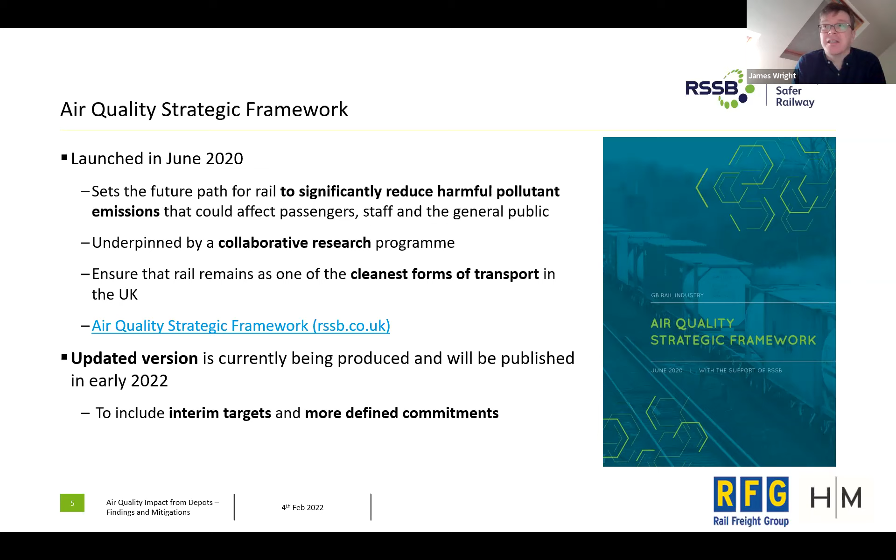We know there's obviously a carbon advantage of rail over other ground-based transport modes, but we really want to make sure the air quality impact is properly understood and minimised as much as we can. The air quality strategic framework is currently being updated, so the new version should be published towards the end of this month, and this will start to be a little more defined in terms of including targets and more defined commitments for the industry.

In terms of the background to this project, when we first started looking at air quality in rail 3 years ago, there were obvious areas of concern, like busy passenger stations. We knew there was a bit of an issue in Birmingham New Street, for example, and some stakeholders from the freight sector started to really highlight that we didn't know enough about train depots, especially urban train depots, and what impact they might be having on urban air quality.

So we established this project to provide an accurate picture of air quality at train depots. As Tom will run you through the details, we covered 3 passenger depots and 3 freight depots. Based on the study and its findings, we produced guidance for the industry on what measures you can take to improve air quality.

It's worth pointing out that the main focus is more on public health and nuisance rather than occupational health, but where we did find one or two areas of concern in terms of occupational health, we did highlight that to the depot operators.

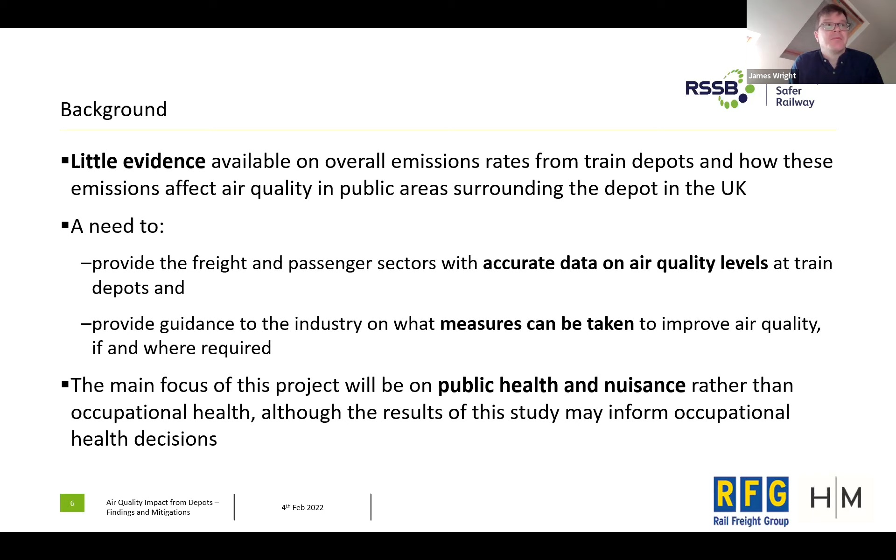In terms of the scope of work, we had 6 depots, 3 from freight and 3 from the passenger sector. We monitored air quality within and at the perimeter of the selected depots. Then, in order to build up an inventory of emissions, we undertook a study of all the various activities that would create pollutant emissions we're interested in, mainly PM and NOx, and developed a high resolution emissions inventory. Tom will guide you through some examples of how those were built up.

Based on that, we used industry standard air quality techniques to model the dispersion of those emissions and see what impact they had on local air quality. Then, based on the surveys that had taken place, we looked at possible mitigation measures, and we developed a good practice guide, which I'll put a link to in the chat later so everyone can download it.

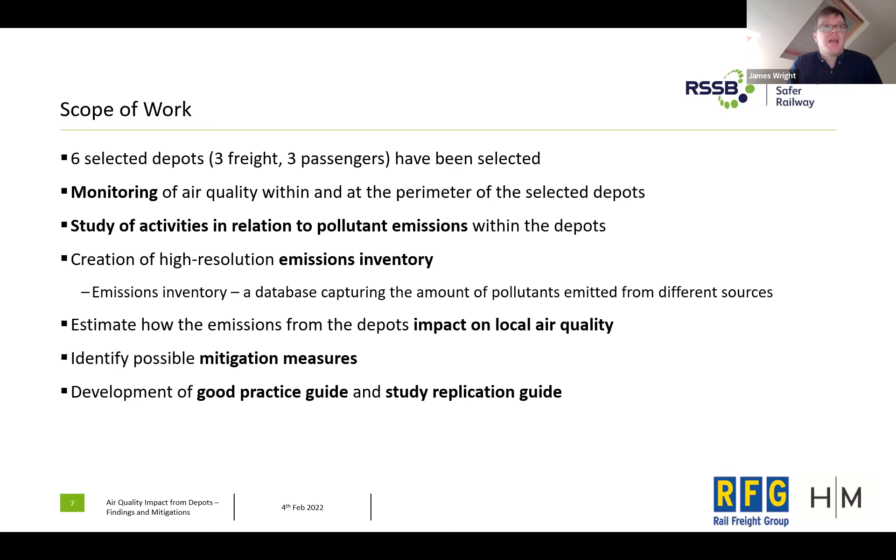Thanks, James. Make sure the slides are working. So I'm going to give you a brief overview of what we did in terms of the project, the findings of the freight depots, and then I'm going to touch briefly on the study replication element. Phil will then follow on with covering the good practice guide and some of the mitigation elements we covered afterwards as well.

Initially, I'm just going to talk briefly about local air quality in terms of what we consider in terms of the objectives. So we took the UK standard air quality objectives as the principal guidance for assessing this, for NO2, PM10 and PM2.5 - those were the objectives that we utilised.

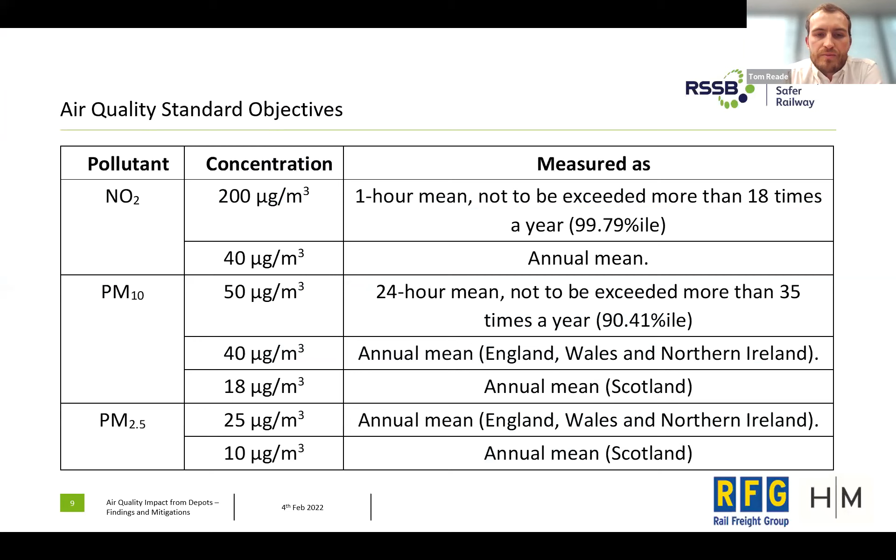Looking particularly at the freight depots we considered, I've taken 2 just for ease of this presentation, though James indicated we covered 3. So we looked at Leeds Midland Road and Leeds Valley Farm Road, which are both freight depots and actually serve one another in Leeds. As background, Leeds City Council have a number of existing air quality management areas for the exceedance of nitrogen dioxide, indicated in the image on the right-hand side of the screen there, with the closest to Midland Road being approximately 2 kilometres to the west, and to Valley Farm Road being 3.3 kilometres.

So these AQMAs have been designated for nitrogen dioxide, and within those, the existing air quality monitoring data has identified exceedances. It's worth pointing out that the monitoring data in the vicinity of these two depots was actually compliant with the objective, and that included some continuous monitoring for particulate matter as well.

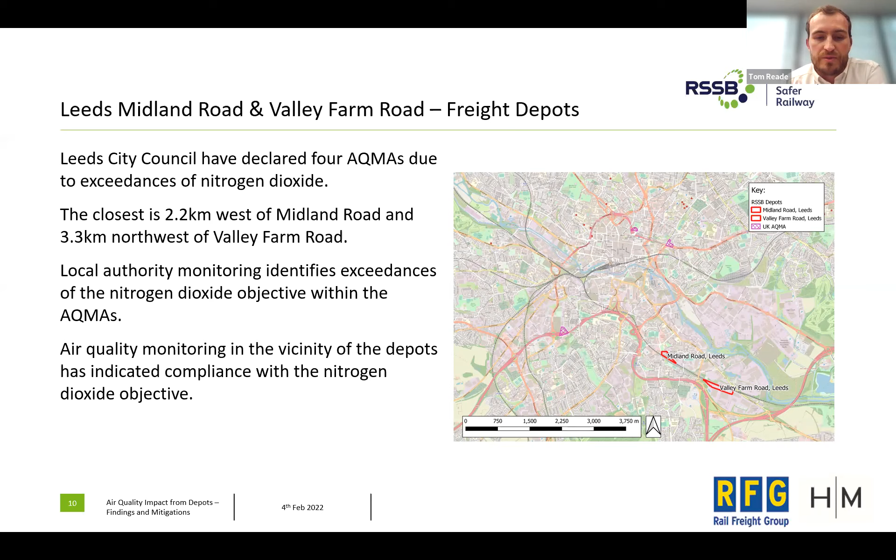So I'm going to move on to the main depot sources. Looking at Leeds Midland Road to start with, we identified the rail activities, the road traffic elements of that, the non-road mobile machinery, and the combustion plant.

On the rail side of things, we looked at the rail lines themselves, the locomotives coming in and out of the depot and utilising the lines, and also the rail lines confined to the sheds, which incorporated fuel sheds or maintenance for both long-term and short-term servicing. The road traffic element was considered for usually the employee car parks and things like that, and also the routing for the non-road mobile machinery.

And the combustion plant, as you can see from Leeds Midland Road, is in the centre of the screen there, indicated by the red dot. So that was usually for the provision of heating and hot water.

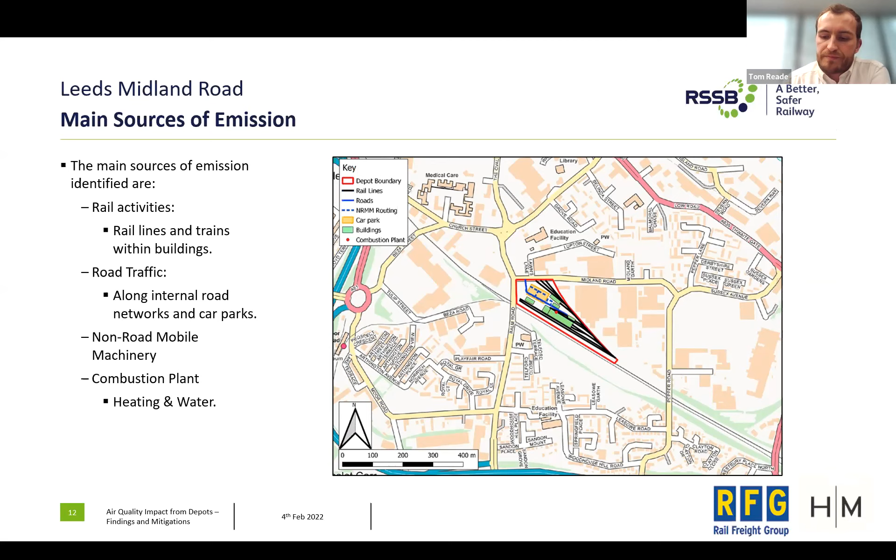Just taking a minute to skip over the slide.

So the main sources on Leeds Valley Farm Road were significantly less than Midland Road. Here we only looked at the rail, road traffic and the non-road mobile machinery and the car park. There were no sources of emission from the buildings within this shed. So typically at Leeds Valley Farm Road, the locomotives come from Midland Road and then join up onto the tracks in the northwestern part of the site.

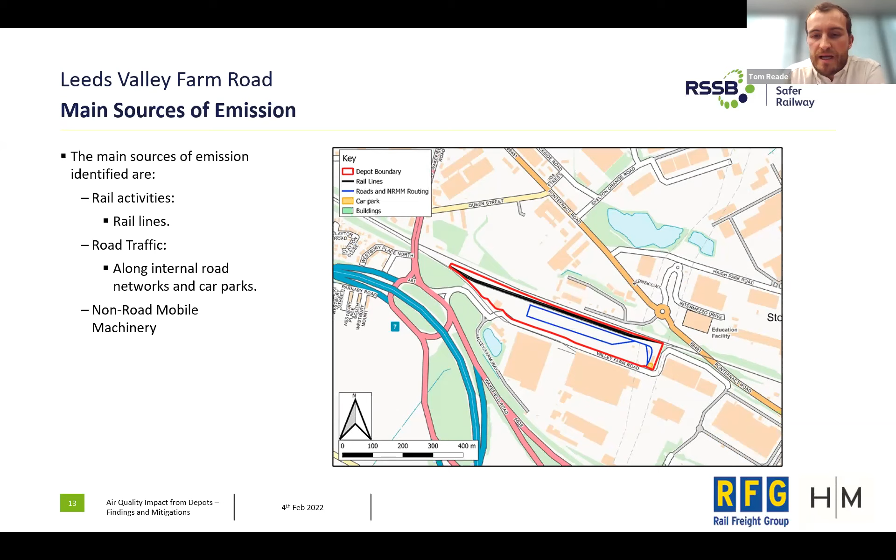Looking at the air quality monitoring side of things, we installed continuous monitoring air quality equipment at two locations. The first was at a background position across the site, and that was in a position for three months. We also utilised another continuous air quality monitoring unit, in order to give us a glimpse of the emissions or the operational emissions from various key activities within the depot.

So at Leeds Midland Road, that incorporated the fuel shed, the maintenance shed and the wheel lathe shed, where a large proportion of their key internal operations happen. We also installed a number of diffusion tubes, predominantly looking at nitrogen dioxide, and they were installed along the perimeter fencing and at some of the key activities within the depot. We typically co-located the diffusion tubes with the continuous monitors.

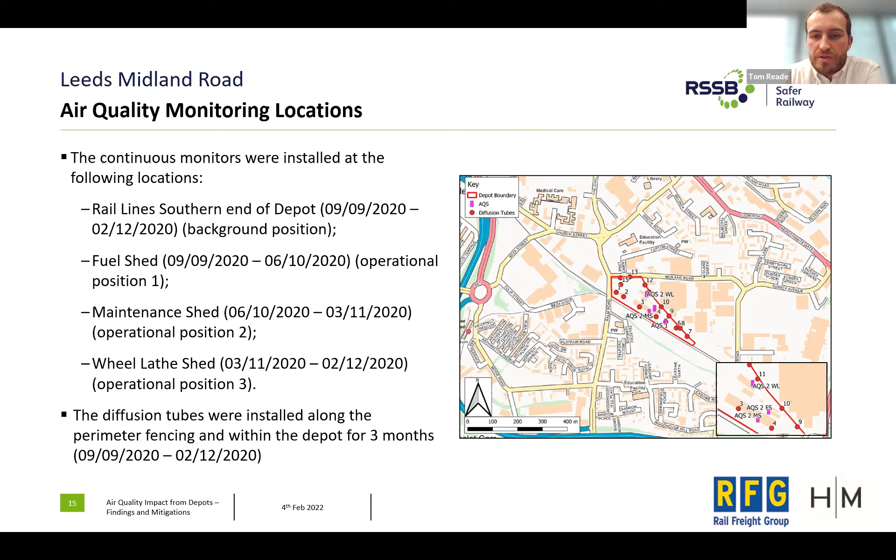Leeds Valley Farm Road, again, we installed two continuous monitors. The first one was at the rear of the workshop, which was located as the background position, and the second was at the locomotive inspection deck, which was on the eastern side of the depot.

Typically at this depot, we didn't need to move the second unit around to capture other activities, because the key activity at this depot was captured both from the movement of vehicles and from the arrival and the idling of the locomotives at the inspection deck.

We also installed a number of diffusion tubes along the perimeters, as we did at the other depots, and we also captured some of the key activities occurring across the depot as well, and these were in place for a period of three months.

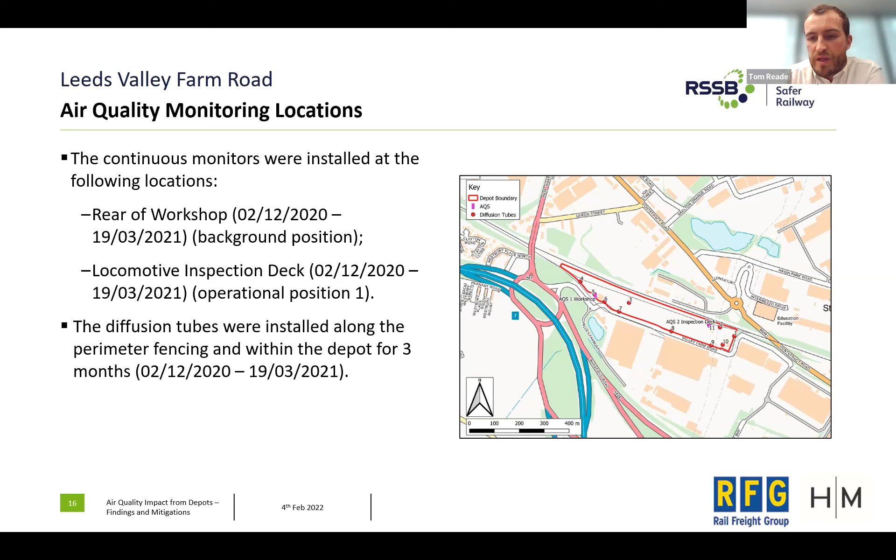So in terms of the key findings for the depots, I've summarised these that were reflective of all of the depots, but in reality they're very much pertinent to the freight depots as well.

So the measured air quality concentrations were typically highest within the sheds. That would be the short-term servicing sheds, where locos would typically come in, be serviced and often left idling or running, compared to the long-term or heavy maintenance sheds, where locos could be in there for anything up to a week, two weeks, three weeks, depending upon the exam being undertaken.

Concentrations within open-ended fuel sheds were typically high, again because of the idling of the locomotives. These were obviously lower than those within sealed servicing and maintenance sheds.

When no servicing, maintenance or refuelling took place, these concentrations were typically higher along the rail lines, usually at the entrance of the depots, where locomotives were often idle before they were sent across to various places for storage on the sites.

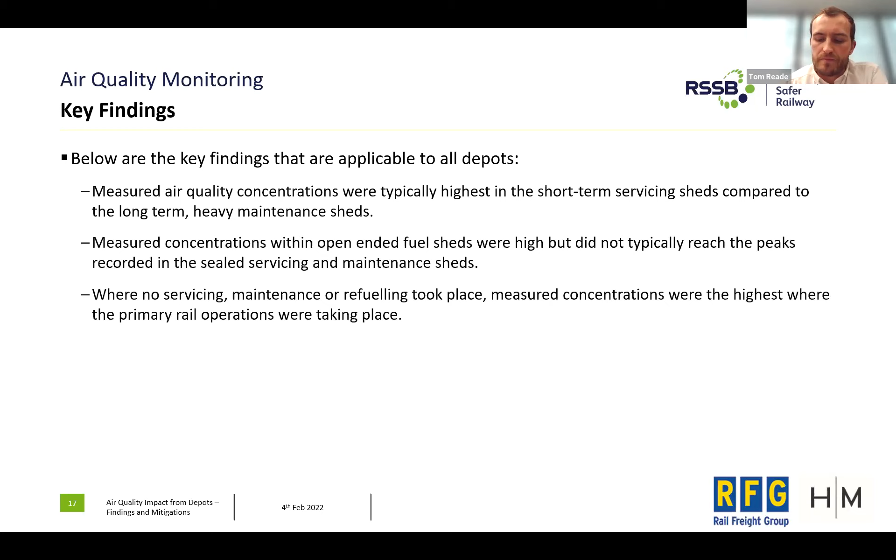So now moving into the air quality modelling side of things, we're looking at Leeds Midland Road to start with. As James indicated, we produced an emissions inventory capturing all of the sources on the depot.

For each emission source, we classified them as transport, domestic and industrial plant, and industrial machinery. Transport incorporated buildings, meaning the locomotives operational within those buildings, car park, rail external to the buildings, the road, and road transport. Domestic and industrial plant reflected any combustion plant on site, such as gas-fired or diesel boilers, usually for heating and hot water, and then non-road mobile machinery.

At Leeds Midland Road, the greatest contributor to emissions, both NOx, PM10 and PM2.5, was from the transport element, in particular the rail. They typically use Freightliner Class 66 and Class 70 locomotives.

Second to this was the operation of the combustion plant for heating and hot water provision for the depot. At this depot, the plant in question was circa 15-20 years old, and since this assessment was done it's been on the agenda for replacement anyway. Thirdly, non-road mobile machinery had the smallest contribution at this depot.

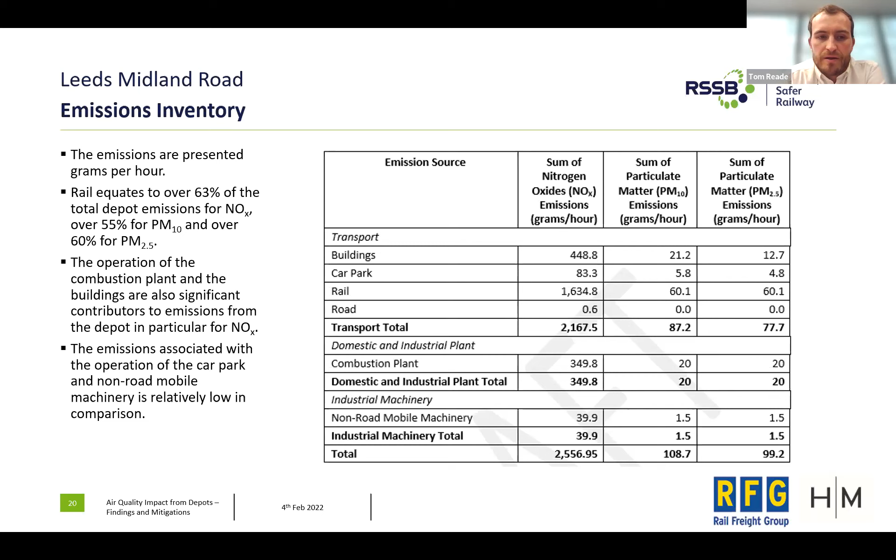Looking at the diurnal emissions, we looked at daytime emissions for NOx, PM10 and PM2.5, and also nighttime emissions. For Leeds Midland Road, there's very little diurnal change between daytime and nighttime emissions, typically because the majority of activity is relatively consistent.

Key times of day, particularly morning and afternoon, are when locomotives typically enter and leave the depot, but a large proportion of servicing and maintenance regimes on this depot are 24-hour operations. Alongside that, the combustion plant is also a 24/7 operation to provide heating and hot water.

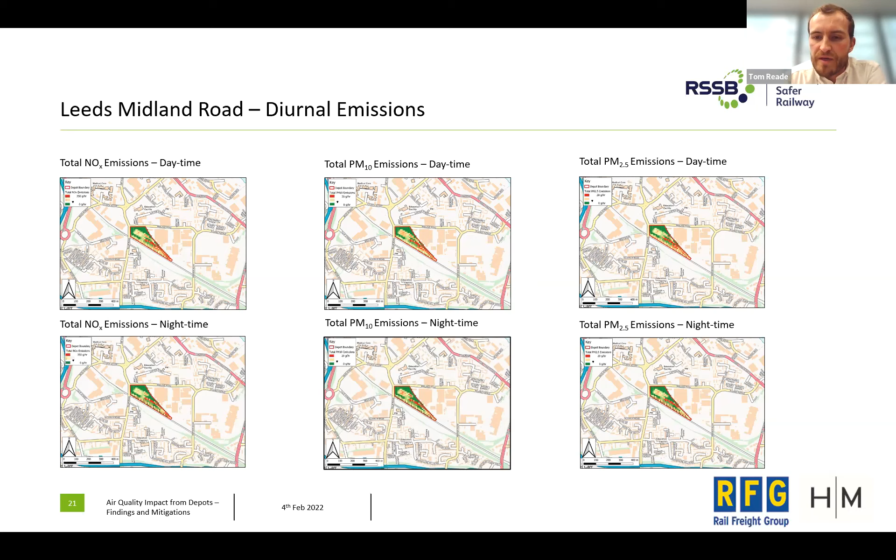We took those emission maps and the emissions inventory and created a series of pollution maps covering NO2, PM10 and PM2.5. As you can see, the key contributors are in the center of the depot, where the on-site combustion plant is located and where the fuel shed and main maintenance and servicing sheds are.

What you'll notice between the emission plots on the previous slide and these pollution plots is that the rail lines running along the southwestern boundary are less predominant here.

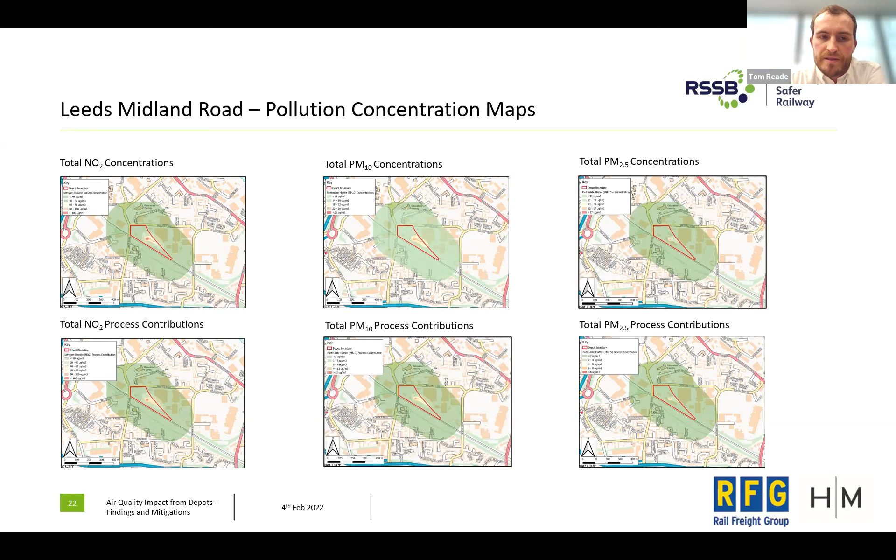The next thing we looked at was correlation with local concern. This was based upon two things: the sensitivity of any land use classes beyond the depot boundary, and any correlation with complaints data provided or received by the depot. We took the distance from the boundary as 200 meters, and classified those areas as high, medium, and low sensitivity.

This was based on the classification in the Environmental Protection UK and IAQM land use planning guide. At Leeds Midland Road, the majority of land use classifications surrounding the site were of medium to low sensitivity, with some high sensitivity receptors located to the south and north. The medium sensitivity receptors are typically industrial office uses.

The predominant wind direction within Leeds is from the west and southwest, so emissions from the depot are typically transported to the east. At this depot, total annual mean NO2 concentrations did exceed the air quality objective of 40 beyond the depot boundary, while total PM10 and PM2.5 beyond the boundary were below the thresholds of 40 and 25 respectively.

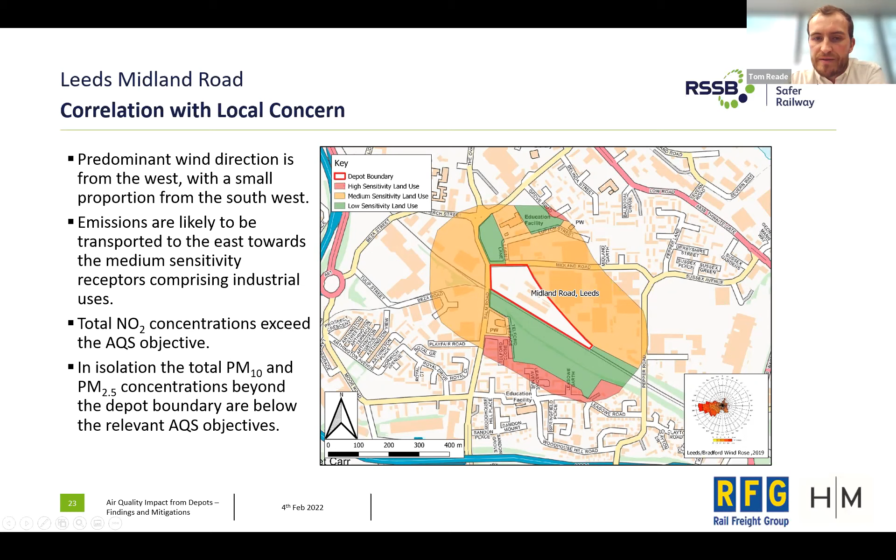So the key findings at Leeds Midland Road were that rail activities, both the rail lines and operational aspects, were a key source of NOx, PM10 and PM2.5, and, more importantly as noted on the pollution plots, the identification of the combustion plant providing heating and hot water.

There were very small variations in total emissions between daytime and nighttime, with daytime very slightly higher due to the arrival and departure of vehicles in early morning and late afternoon.

Total NO2 concentrations exceeded the objective beyond the depot boundary on an annual basis. However, given the nature of the uses to the east, industrial and office type, the short-term objective was more applicable, so further work was done on the short term. In isolation, PM10 and PM2.5 concentrations beyond the depot boundary were all below the relevant objectives.

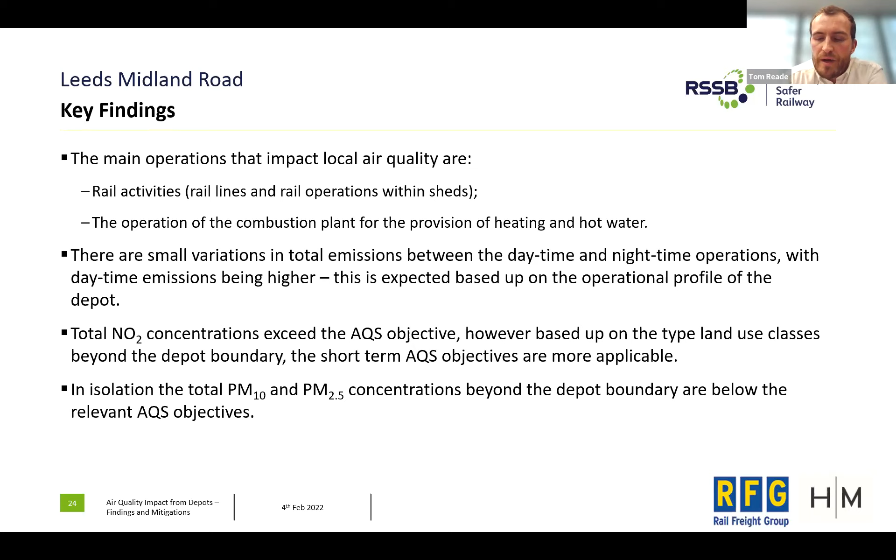Just going to cover Leeds Valley Farm Road now in the same way. So for the emissions inventory on Leeds Valley Farm Road, we took the same approach. We gathered all of the information regarding all of the sources, classifying them into transport, domestic and industrial machinery.

The key difference here between Leeds Valley Farm Road and Midland Road is that the proportion of emissions are highly concentrated towards the operation of non-road mobile machinery in this case. That's because at Leeds Valley Farm Road they have between 5 and 6 arrivals per day, whereas Midland Road is effectively a servicing and maintenance depot, so they have a substantial number of movements per day coming both in and out, plus post-examination testing of locos.

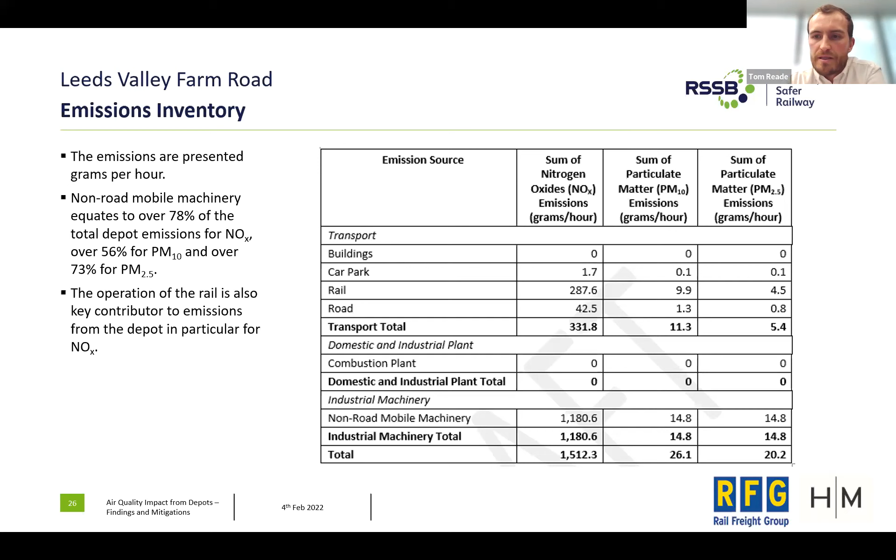In this case, non-road mobile machinery contributed to about 78% of the total depot emissions for NOx, 56% for PM10 and 73% for PM2.5. You will note that in terms of the transport element, rail contributed the greatest part of the transport emissions. So looking at the diurnal profile, for NOx, PM10 and PM2.5.

Between the daytime and the nighttime, for both NOx, PM10 and 2.5, there is very little, if any, diurnal variation. The non-road mobile machinery and locomotives arrive throughout the 24-hour period, so some days there were 3 during the day and 3 at night, sometimes 2 in the day and 3 during the night. Typically, across a typical day, the emissions were largely consistent between daytime and nighttime.

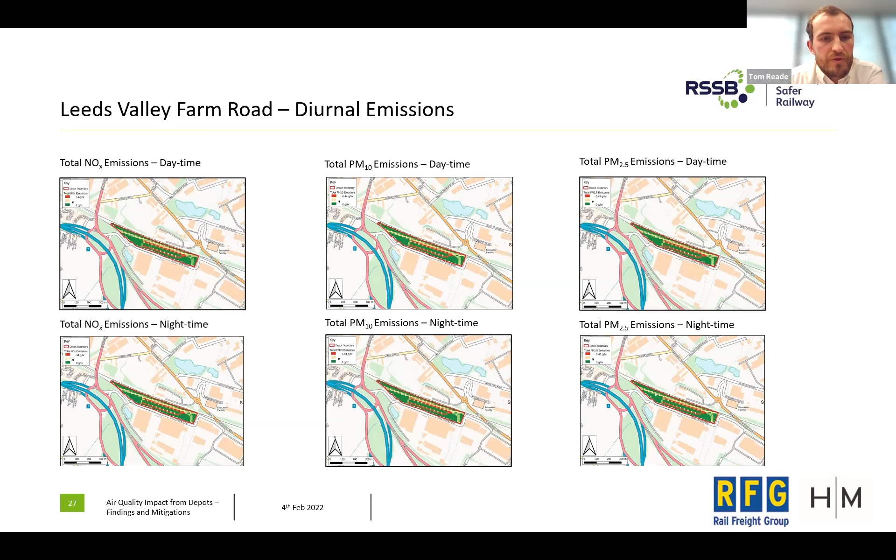On that slide you can identify the emissions from the rail lines, which run from the northwest to the southeast. You can also identify the routing around where the non-road mobile machinery was tracking, on the red line, which comes down from the northeast around the southern or southwestern boundary.

Converting that into pollution concentration maps, we again looked at NO2, PM10 and 2.5. The top images are total concentrations and the bottom 3 images are process contributions. Considering the NO2 total concentrations, you can see that the highest concentrations are limited to the center of the site, and the same with PM10 and 2.5.

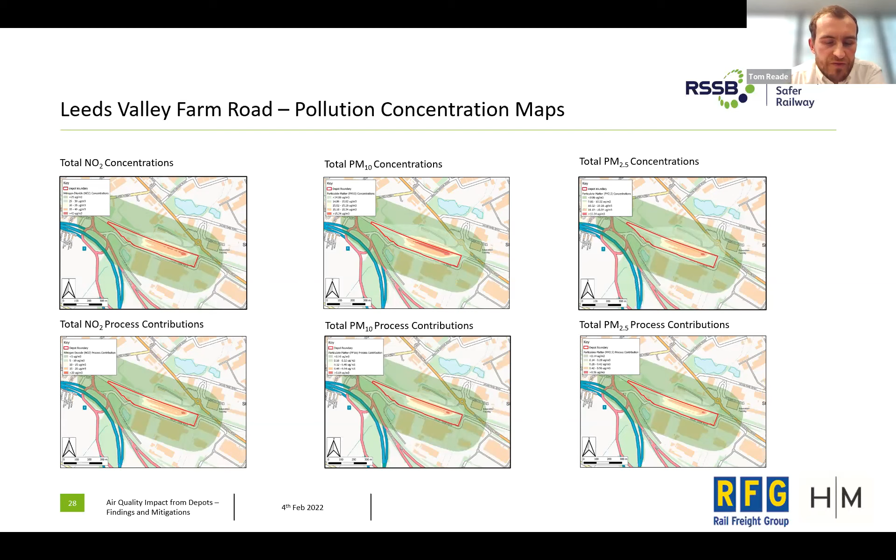That's typical in terms of where the key routing is in the arrival and idling of the locomotives, which is on that red section, where the highest pollution concentrations were identified. And that's reflected in the process contributions as well.

From the correlation of local concern, the sensitivity of the land use classes around the outside were low to medium, with a very small proportion of highly sensitive to the west. Leeds is based where the wind is predominantly from the west, so the majority of emissions from the depot taken beyond the depot boundary occurred on the eastern side of the site.

In isolation, the depot itself - the total concentration of NO2, PM10 and 2.5 beyond the depot boundary were below the air quality objectives. However, there were some exceedances within the depot boundary itself.

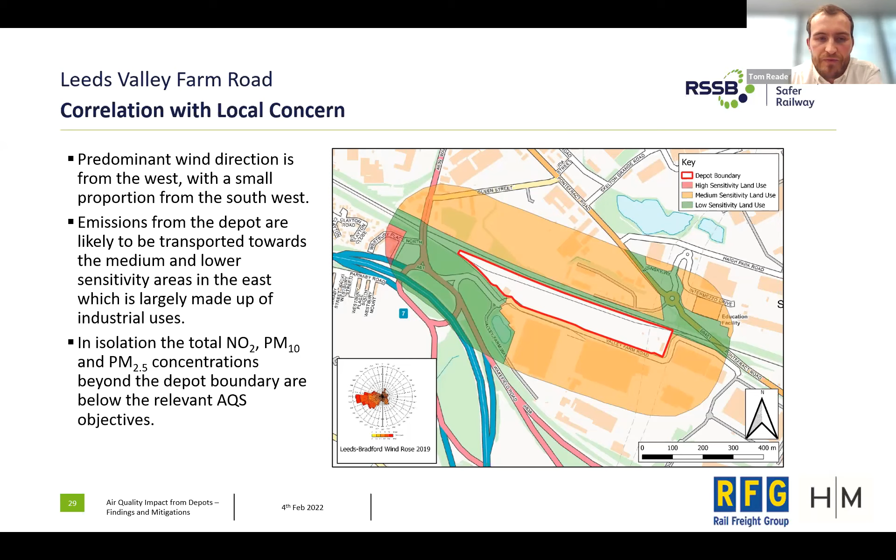So the key findings at Leeds Valley Farm Road were that the key sources of emissions were from the rail, on the rail lines, and more predominantly from non-road mobile machinery. There was little to no diurnal variation between daytime and nighttime, which is expected based on the operational profile of the depot. In isolation, NO2, PM10 and 2.5 beyond the depot boundary were also below the air quality objectives.

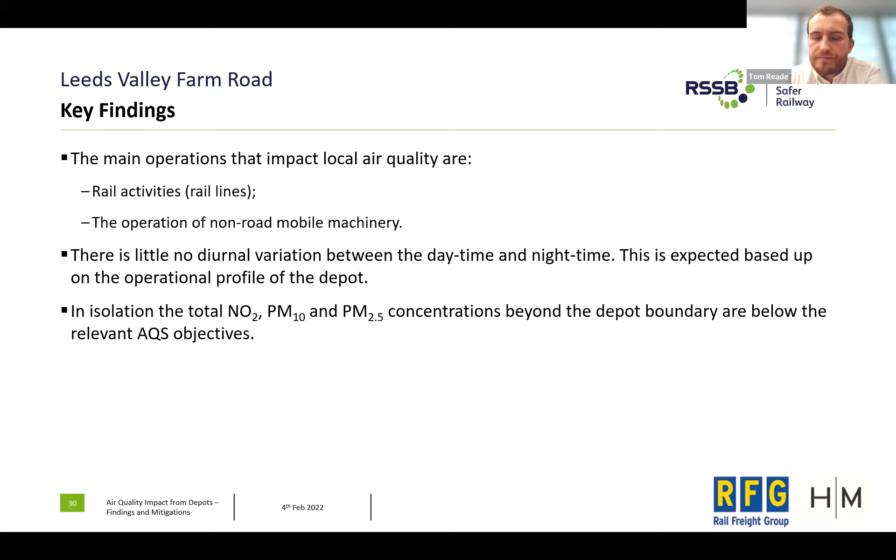So that was obviously a very brief overview of the key findings from 2 of the depots. There's a lot more to show, but we're obviously quite limited on time. So now we're going to move on to the study replication guide, which was formed post modeling.

We've covered the air quality monitoring element and the air quality modeling. For the study replication guide we produced, there's no requirement specifically to use the equipment we selected. However, the unit we used was the Aeroqual AQS1, which continuously monitors nitrogen dioxide and particulate PM10 and 2.5. You can also install other equipment to pick up other pollutants if that's what you're looking at, but these are the 3 key ones we need to be considering.

At the outset, you need to determine the number of monitors you require. Two would be the minimum, which is what we utilised. We installed one at a background position, located away from any key sources on the depot, and the second unit, or any subsequent units after that, can be installed at key depot activity locations for a period of 3 months, which is what we utilised.

Where possible, you should continue to take wind speed and direction data, so you have site-specific information, and data should be collected at 1 minute intervals to enable good interrogation of the data sets.

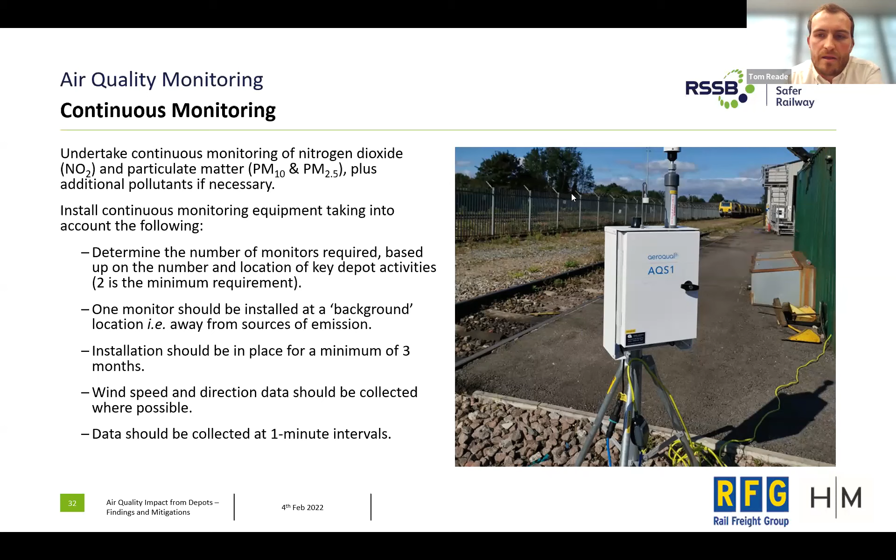Onto the passive monitoring side, we specifically looked at nitrogen dioxide, though there are other options you can take forward as well. The diffusion tubes in our case were installed on the perimeter and other key activity locations. We undertook this analysis for 3 months, and each tube was changed every 4 weeks in accordance with the LAQM guidance, then sent back to a UKAS accredited lab for analysis.

As I said, the survey we undertook was for 3 months. However, that can be undertaken for 6 months, 9 months, or 12 months. Obviously, the longer the survey, the better the data collection, and the less chance for any adverse or odd data to come back. The tubes are quite easily deployed, they don't require any power, and they're very cheap to buy. So it's a very good way of understanding some baseline NO2 information around the depot.

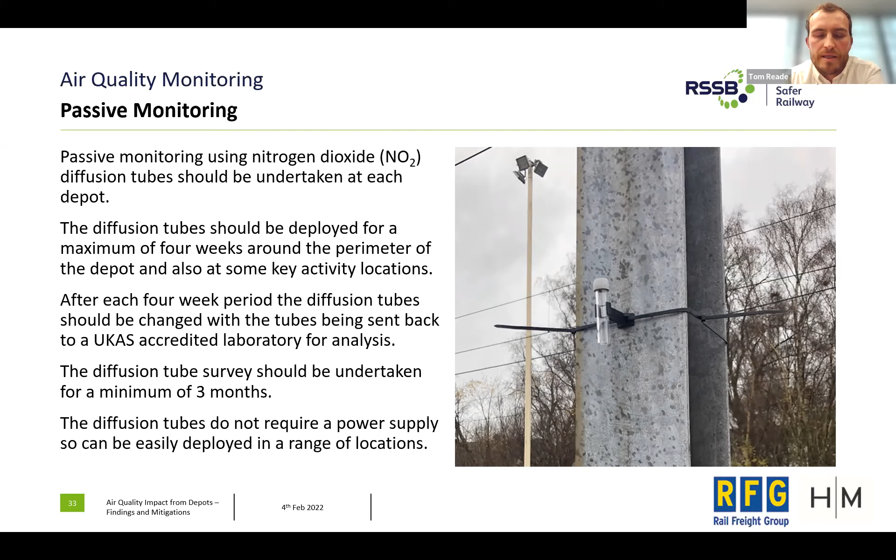For the road, we looked at speed limits and daily traffic into the site, HGV routes and any vehicle routes. Car parking information was based on typical working days. We did car park counts to understand how many car parking spaces there were at each of the depots, but also how many of those were utilised on a typical working day.

The rail element was obviously the most in-depth in terms of analysis and data collection. We had to obtain depot workflows and yard plans, servicing sheets, any idling policies, details of shunting locomotives that passed through the depot and what class they were, what notch they operate through the depot, the power in their engine use, and then in terms of inventory information, fuel use and consumption, delivery, hours of operating. There's a very extensive data collection process that has been undertaken.

This information was gathered through a number of site visits, with observed information from our point, but also video conferencing and telephone conferencing with depot managers, site managers, and various other people in the depot. In terms of combustion plant, that was about technical specifications and operational profiles, location of plant and flues. Non-road mobile machinery was about obtaining technical specifications for the units, the emissions data, principal routing and operating schedules they were utilised under.

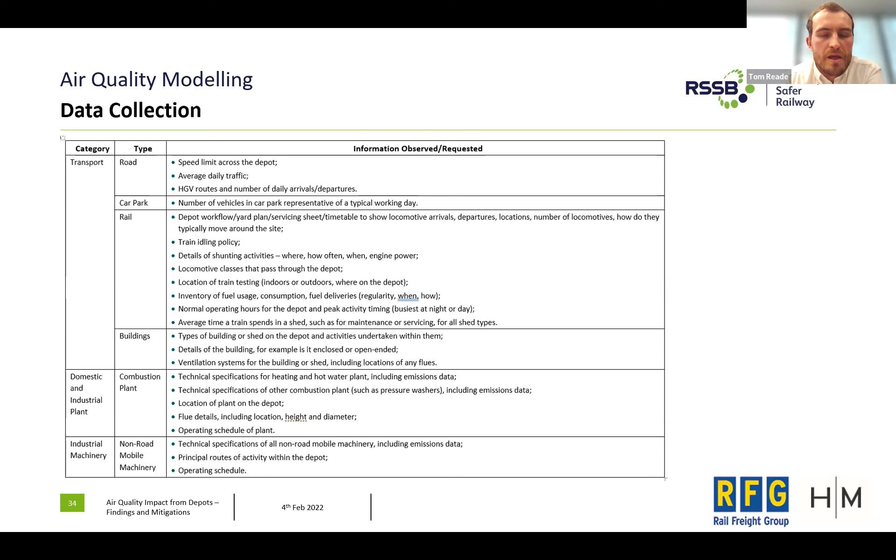This was quite an extensive process, so we produced one of these for each depot for both the daytime and nighttime, and then a 24-hour operation one as well. It was a very useful tool in being able to understand where the locomotives went. We had months and months of logs for each of the depots.

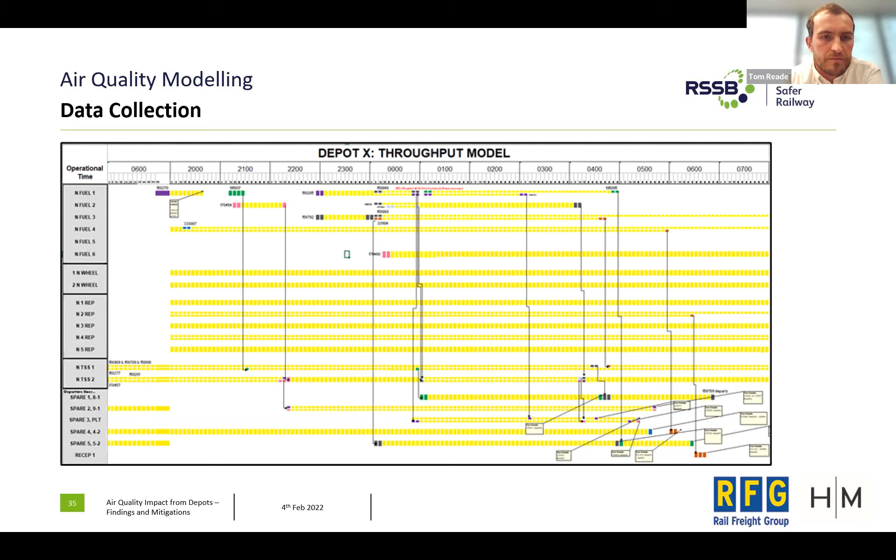In terms of the approach and methodology to the air quality modelling, after the data collection period and pulling together of those depot throughput plans, we used EMIT - Cambridge Environmental Research Consultants' atmospheric emissions inventory tool - to create the emissions inventory and the fuel inventory. We also utilised that to support the diurnal variation.

The outputs from EMIT can be output into a format for ADMS Urban, which is the pollution dispersion tool we utilised. In ADMS Urban, you provide your inputs alongside your receptor points in the gridded outputs and gridded inputs, and the outputs from that were then deposited into QGIS, the GIS tool we used to provide image outputs for the heat mapping and concentration plots alongside the land use sensitivity and emission source locations.

There was a number of conversion toolkits required, because into EMIT and into ADMS goes NOx, but we needed to produce NO2 plots. So we used a DEFRA emission factor toolkit for the creation of those emissions for the vehicular side of things, to convert NOx to NO2.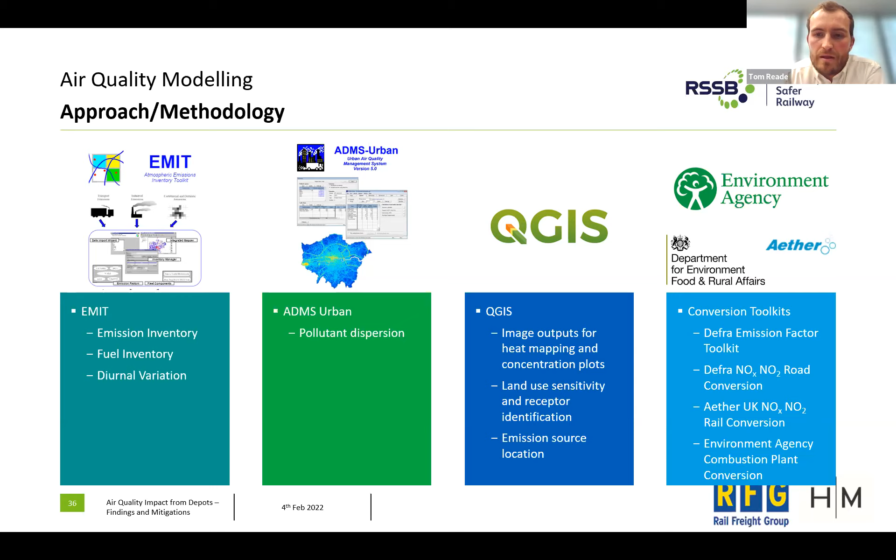Next, I'll pass back to Phil on the mitigation in practice. Thanks, Tom. So after the study for each particular depot, in understanding the emissions and their likely impact on local air quality, the project started to look at the possible mitigations to try to improve, whether to reduce the emissions or to reduce the impact on local air quality.

This exercise has been done for each selected depot, and some recommendations have been made on this basis. One point to emphasize is that all the recommendations are purely focused on the potential air quality impact. The process has not taken into account cost or feasibility, and when it comes to implementation, the cost benefit analysis or feasibility analysis will be an important element to take into account as well.

This industry good practice guide is divided into various sections. It provides readers a brief introduction and background information about the applicable air quality legislation and standards, both within the depot and outside the depot, and background information about the health impact from exposure to poor air quality and also on the natural environment.

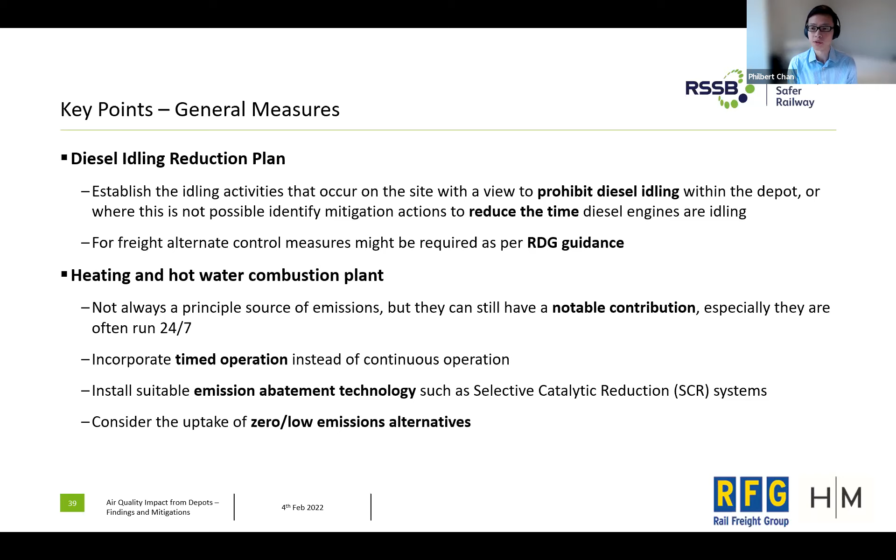NRMM, the non-road mobile machinery, is again another notable contributor to emissions within the depots. Obviously, the cost and performance of these machineries would be a key factor to consider, but their emissions should also be considered during the procurement process.

Electric alternatives could be considered. We know that this is not always possible, but at the same time, this area is actually developing quite rapidly. There are some good examples like those being adopted by the HS2 project, so there could be some learning transferred from there to various depots as well.

In terms of monitoring, there are basically two key elements. First, related to the idling reduction I mentioned before, there will be a beneficial element in monitoring the idling reduction plan being implemented, because it will help you track how effective this is, and whether there are certain elements that you can go further to reduce idling.

Air quality monitoring, as Tom has suggested in the study replication guide as well, would be a very good element and instrument to track your mitigation measures, especially since you need to know whether or not the measures implemented are effective or not.

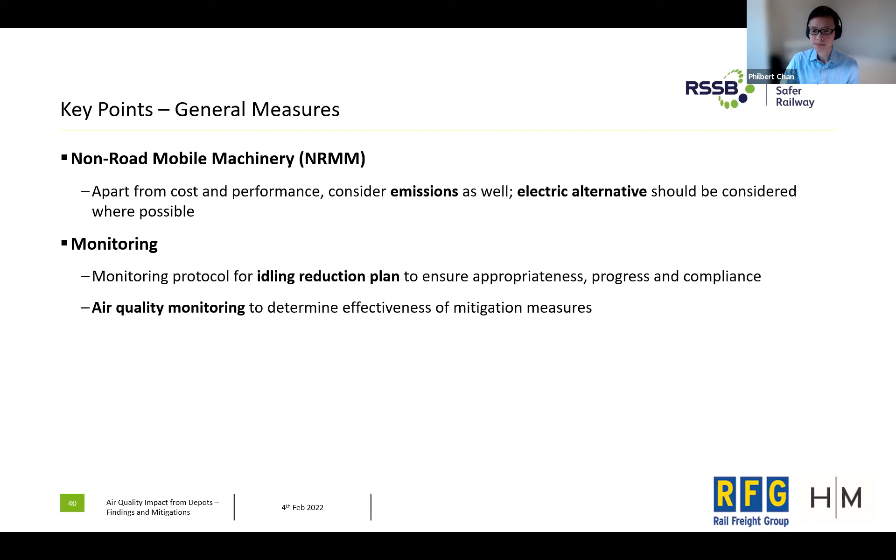And a few freight-specific mitigation measures have been highlighted in the good practice guide.

I think traditionally there is quite a bit of reliance on diesel power generators, especially for backup power. While this can be understood from the logistical side as well, where possible, the use of diesel power generators could be reduced by, for example, establishing an existing electrical connection where possible. Obviously, there are many cases where this may not be possible.

Then alternative measures to reduce emissions from such combustion plants like generators could be considered, like choosing units that are compliant with the latest emissions limits, proper maintenance of such units, and one thing that is often omitted is the appropriate siting of the generator flues.

Because the flue itself, the design, siting, height, etc., could have a very considerable influence on how the emissions from such generators impact local air quality.

Another element is known as dust management. So, for instance, some depots, say depots handling aggregates, etc., would naturally generate a lot of dust. There is existing guidance from the IAQM about the handling of dust or even construction activities to reduce emissions and air quality impact.

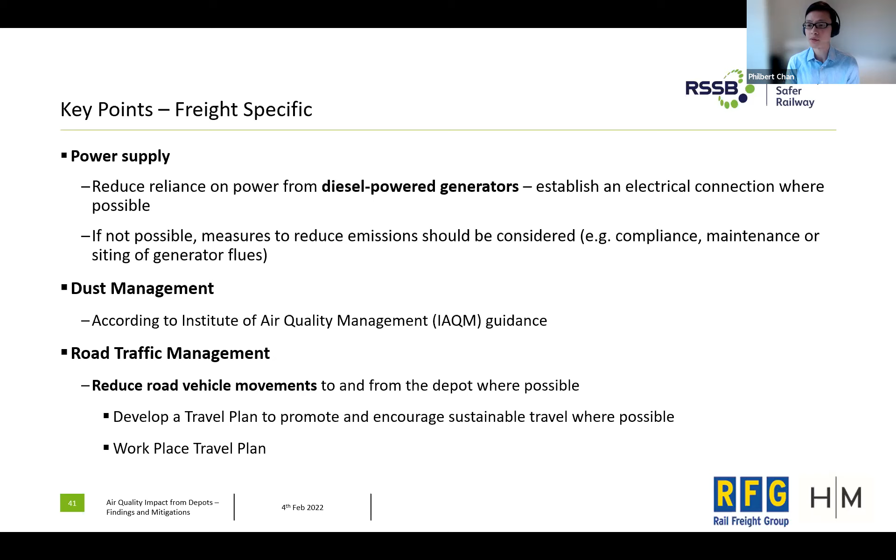For Leeds Neville Hill, a hypothetical scenario has been chosen to look at how the existing combustion plant, gas fired or oil fired, could be replaced by renewable alternatives like electric alternatives, so there could be very little or virtually no emissions from such a unit. For Bow, similarly, it's the removal of the combustion plant and all the diesel powered NRMM with electrical alternatives.

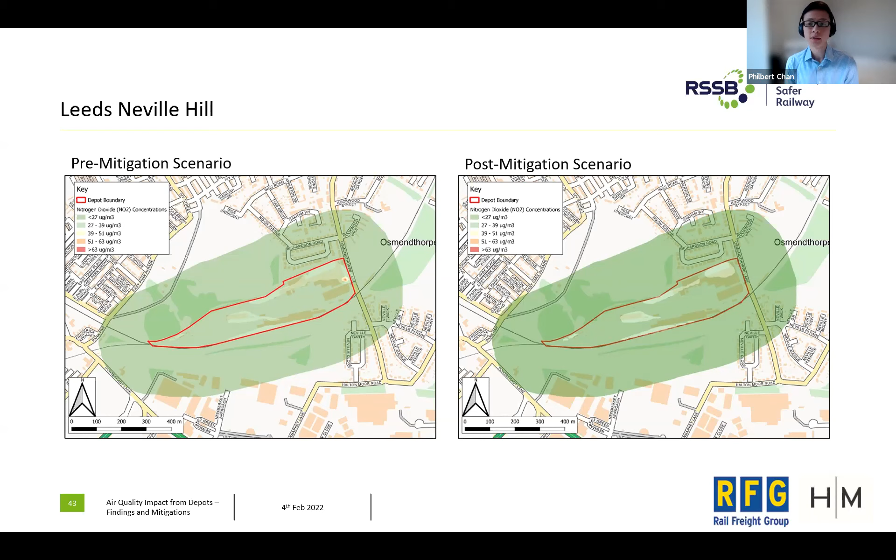Here is a link to the various study reports that you can download, and as James has already shared on the slide in the chat box as well.

Just a couple of slides before we finish our presentation. Following on from this project, we have planned two potential future projects to make use of the findings from what we've got so far, and to push forward to find out what else we can do to look at the bigger picture.

The first one is a research project to look at the potential mode shift from other transport to rail. The focus is on the various major rail hubs, including for example a freight depot, to look at if there is more and more passenger or freight movement to rail, how this could impact on local air quality and the overall emissions.

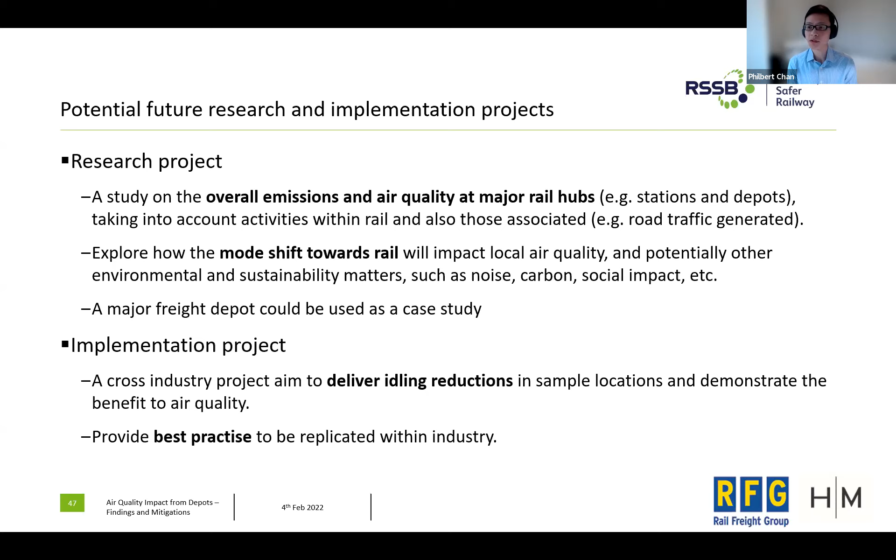I think that's the very last slide indeed. So I'll stop presenting for now, but I think we can either go to the Q&As or the questions raised in the chat box, and we'll take it forward from there. Thank you very much, and thank you all three.

It's absolutely fascinating. I'm not sure where the other slides have gone. Brilliant, thank you. So we've got a few questions, one in the Q&A, and a few in the chat. If those listening have got any more questions, please do pop them in because we've got some time. But let me take chair's prerogative and ask one or two before we start.

When we started talking about air quality a few years ago, one of the things I was certainly concerned about, and still am, is the impact of sensible measures like clean air zones and air quality management areas on the ability to operate freight in terminals. I think we've come a huge way through work like this in understanding more about how we measure our impact at a local level, and how we manage that at a local level. In that same time, we've seen more clean air zones, more ultra low emission zones or charging zones, but they've been very much still focused on roads. What's your sense of how quickly rail's going to get scooped into those zones?